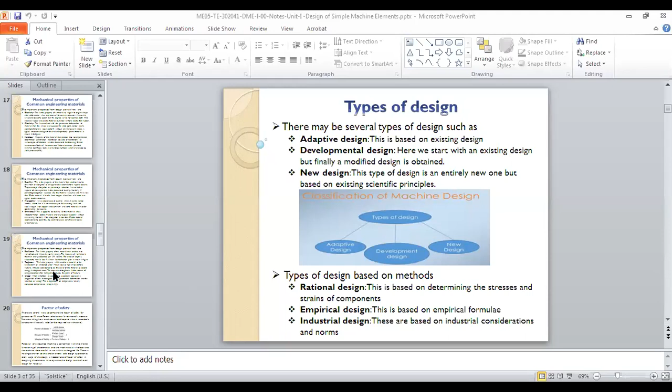I think last time did we finish all the mechanical properties? Just let me know in the chat. Yeah, screen is not visible because I haven't shared it, I am sharing it right now. Before sharing, I just want to make sure what we have covered. Okay, so now the presentation should be visible to you guys. We have seen till the last lecture, I think, different mechanical properties. I think we were at the point till the factor of safety, right? Yes, sir. Okay, fine.

So what we will do today is go through this, because I have to go a little fast, as we have to complete three designs: cotter joint, knuckle joint, and lever, as part of this first unit. But I just want to make sure your basics are clear before we proceed, at least the notations, and what are the different materials we use, so that those are clear to us and we have some basic knowledge. We have to spend a couple of lectures on this, no option for that. So today we'll try to finish.

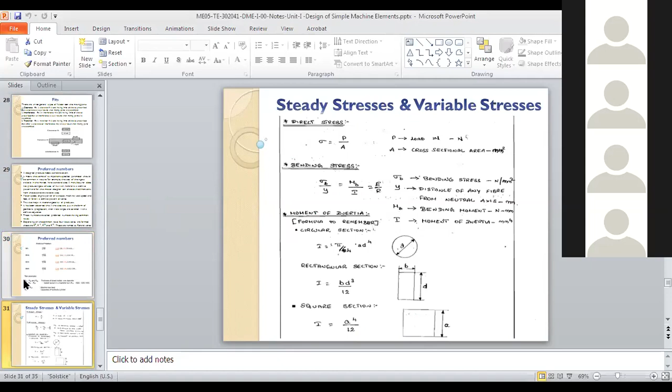What is factor of safety, then what are the different kinds of limits and tolerances, fits, and then preferred numbers. I just want to finish with preferred numbers, and if possible, start with the basics of stresses and how to calculate basic stress. So we'll try to go through that today.

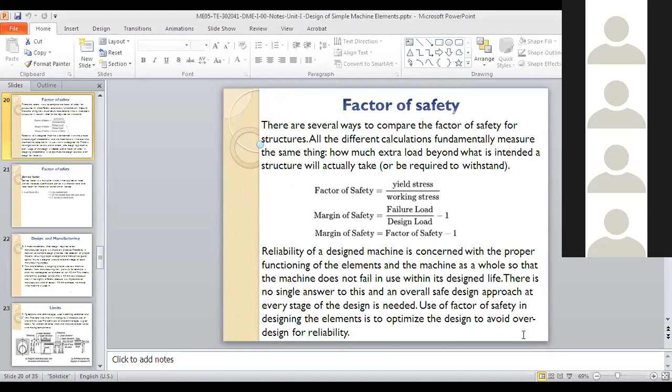First, factor of safety. You guys know what factor of safety is, right? Or why factor of safety is there. Whenever we are doing any kind of design, at that time, just let me pause this.

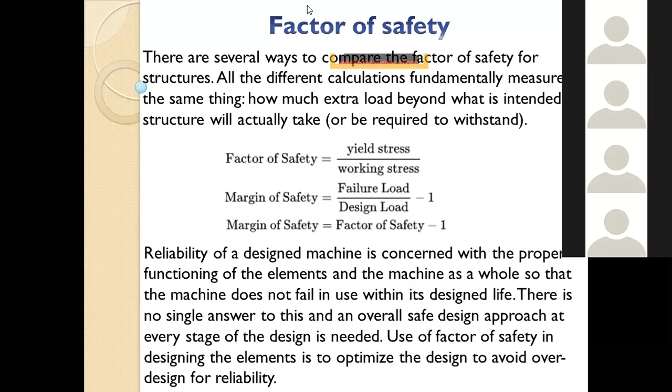Okay, so now what is factor of safety? Whenever we are doing any kind of design, we need to have some kind of margin. Say if you are making a bench, and with the load of one person, 100 kg, it fails, then you cannot design it for 100 kg. You have to make sure, because that bench may not be used by one person, maybe two or three people will be sitting on it. So you need to have some kind of margin, a safety buffer, in between those two, so that even though your load goes up, still your design will not fail. That is something called factor of safety.

I will not go into too much detail because you already know about it, but I just want to cover the basics of what factor of safety is. Like for a plane, it is fatal - if something goes wrong, if any part fails, it's fatal.

It means it might affect, it could directly be, you can say, a reason for death of people. So there you have to put a higher factor of safety. But in a flour mill, or where there is not very high risk, you can put a lower factor of safety.

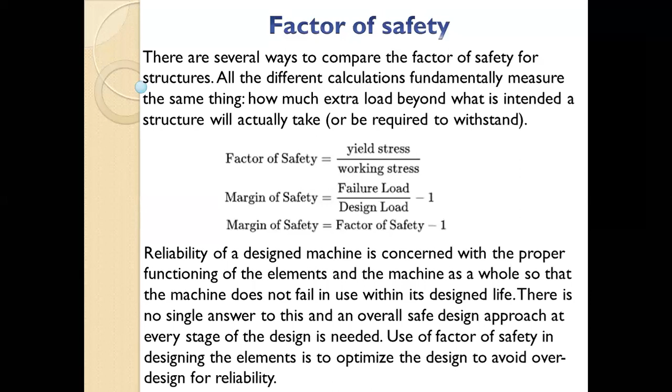Now, reliability - with a higher factor of safety, your design will be more reliable. But you cannot put a very high factor of safety, because as I said, it will increase your cost or raw material. That's the issue, so you have to be very careful while setting the factor of safety.

Now something called service factor. Okay, let me just - I can hear some people. Someone has a question - Pankaj, yes Pankaj.

Yes. Sorry for the interruption, sir. I want to ask regarding the factor of safety of an aeroplane. Its factor of safety is high, right? Yes, more than usual. Actually, you want to know why it is high or how it is calculated.

As I said, for the aeroplane you have to have a high factor of safety. The reason is that if anything goes wrong, it is fatal. Fatal means the after effect will be death. So if your engine's nozzle fails, the engine fails, and there is no option of taking the plane aside, repairing it, and running it again. No, it's in the air. It is fatal.

If you are going to use the same nozzle in a road vehicle, your factor of safety will be 2. But for a plane you will be putting factor of safety of 3, because you want to be more cautious, you want it to be more safe. The problem with more factor of safety is that your design will be heavier and more complicated, but it is okay for the plane because you want to spend more money rather than losing people.

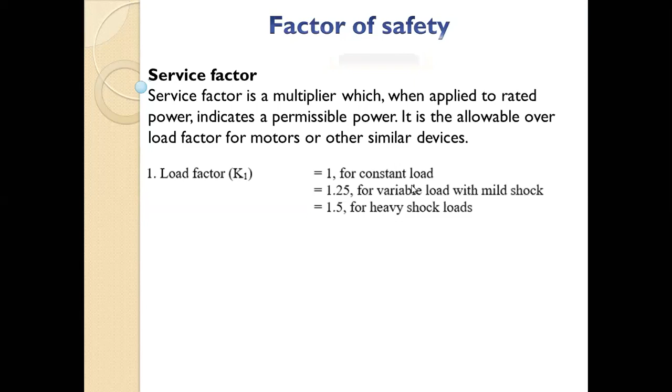Now we are actually starting with design and manufacturing. You need to know that when we are doing any kind of design or manufacturing, the output of our design will be a diagram. For the workshop or manufacturing people, we need to give them diagrams showing how the design looks and its dimensions, and depending on those dimensions your manufacturing will be done.

But for the dimension, now the problem is when we say my shaft or gear has to be with certain dimensions, or my shaft has to be 40 diameter, when we actually manufacture it, it will not be exactly 40, because there are so many factors, starting with the skill of the person manufacturing it, the labor, the machine on which you are manufacturing it, and the tool you are going to use.

If your tool has wear, then your finishing will not be fine, or it has vibrations, or the lubricating liquid you are using is not proper. So with so many factors, starting with the raw material not being of good quality, to the finishing process you are using, there are so many factors affecting the quality of your product.

So your ultimate final outcome may not be 40, it may be up or down. Are you getting my point? So when you are manufacturing anything, your output may not be what you expected, because every time you cannot say I want exactly 40 for each and every part.

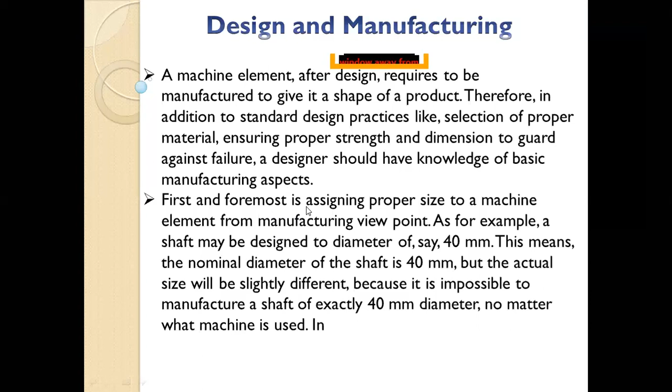This is where you have to do the design, because you cannot exactly expect 40, it will be very difficult to manufacture that. So for that you will be using limits. I will not go into too much detail - I hope you have gone through these limits and tolerances in other subjects. Actually, it is not even part of our syllabus, but I just want to make sure everybody at least knows what limits and tolerances are.

In this example in the diagram, I have shown the shaft and hole. For the shaft and hole, minimum diameter cannot be less than this, because otherwise it will be jammed with my shaft for a hole. And my maximum diameter, if it goes beyond this diameter, then my shaft will be too free to rotate. Similarly for the shaft, maximum diameter and minimum diameter is there.

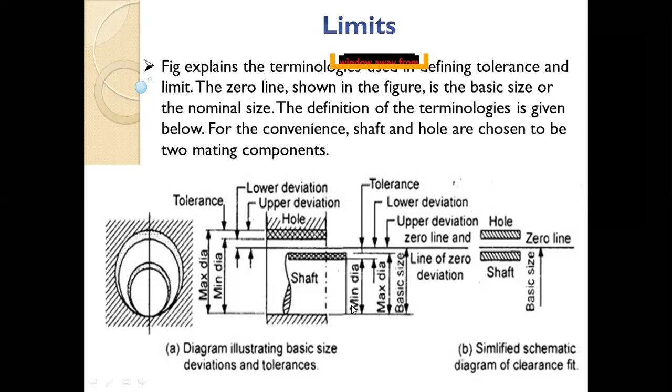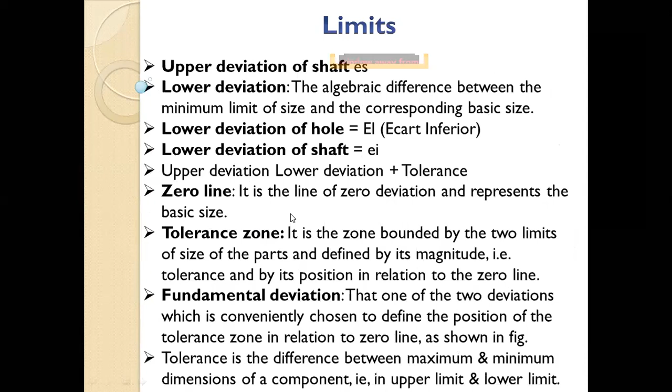These are the deviations - how much I can deviate from the mean. So mean is 40. I can go up by say 1, 2, or 3, whatever it is, and I can go below by 1, 2, or 3, whatever it is - whatever limits you are going to put. So depending on that, you will be putting limits. These are all the basic size, actual size - all these you already know about, so I will not go through it, but I will put it in my presentation. You can go through that later if you want.

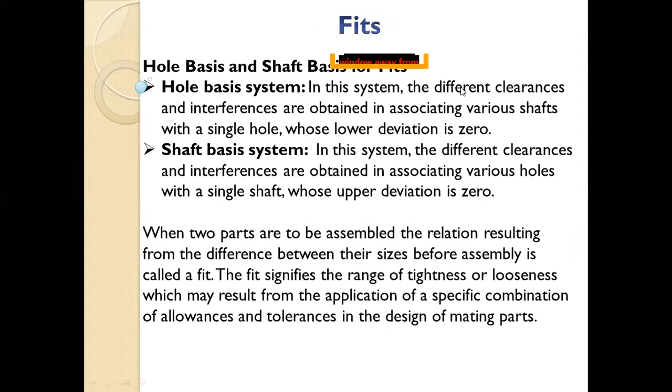Now for fits, there are basically two systems: hole basis system, in which the hole is the base and you will be changing the shaft, or shaft basis system, in which the shaft will be fixed and you will be having different kinds of holes. So there are two systems for what you can say fits.

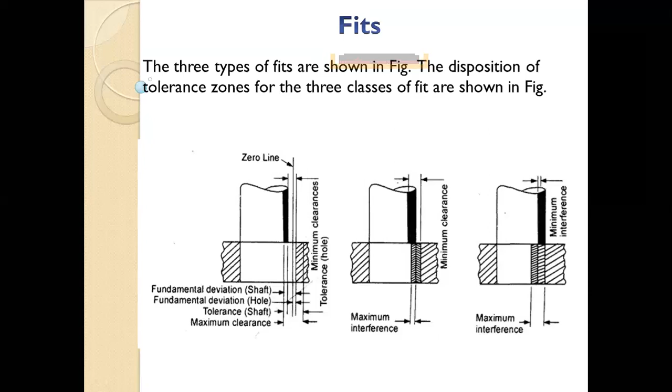Now there are three types of fits: first is clearance fit, second is interference fit, and transition fit. Clearance fit means whatever two mating components are there, they have a clear clearance between them - between shaft and hole there is a proper gap. If your shaft's maximum limit is 41, then your hole's minimum diameter will be 42, so there will always be clearance. Your hole will never become below 42 and your shaft will never go above 41, so there is a proper clearance.

But it is possible, in what I'm going to call transition fit, your shaft is from 40 to 41 and your hole is from 40 to 42. That means there is a possibility that sometimes it will be clear, sometimes it will fit. So that is called transition fit - it is in a transition phase, going from clearance towards interference.

And interference means it is interfering - your shaft is having a diameter of 40 and your hole is having a diameter of 39. So that time it will always be having interference, it will be fit into each other. So that is interference fit.

If you look at this diagram, where I have put a cross mark for the hole and the shaft is blank, so the hole is above the shaft - shaft and hole have a clear gap between them, it's a clearance fit. In the diagram below, now the shaft is going above the hole - that means it is definitely going to be interference, fit into each other. And when it is in between, you cannot say definitely, it's a transition fit.

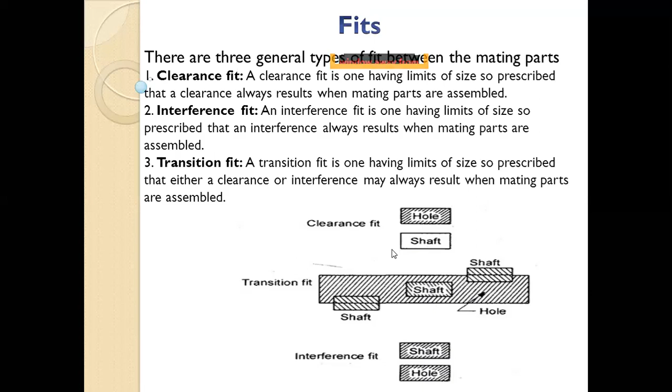Now, something called preferred number. You should know about it. What are preferred numbers? There are some series we use: R5, R10, R20. What are those series? We'll talk about this. These are called Renard series.

But what is this preferred number, and why are these preferred numbers required? Whenever you are going to do a design, you will be using this preferred number series, or when you are going to develop a new product, you need to know the preferred number series. Whenever you go to the market and say I want something, you cannot say I want this gear of whatever dimensions, or a rope of whatever size. The rope will be available only in specific sizes in the market. You cannot get any size.

Why is that? Because, like steel for your concrete, there will be 8, then 9, 10, then 12. 11 will not be available. After 12, there may be 14 or 15 available. This is true for everything.

Like if you go to buy a motor, the RPM of the motor will not be any RPM. It will be from say 1200, then it will go to 1500, something like that. It will have a certain jump, after this, the next available is that. Now the question is, why is that? Because as a manufacturer, you cannot produce every rating or dimension of a component. So you have to have some standard.

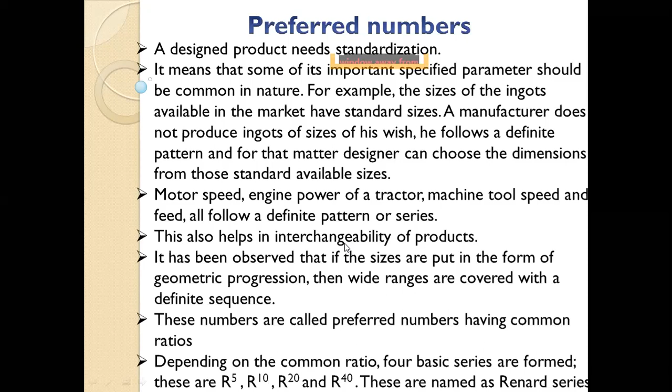So this next number is called the preferred number. This is what I am preferring, I want this number. So how do we come up with this number, or what is the best way to arrive at it? We have something called a preferred series, the Renard series.

We use something called R5, meaning the fifth root of 10. If you take your calculator and find the square root of 10, it will be about 3 point something, since the square of 3 is 9. Similarly, if you take the fifth root of 10, it will be 1.58. If you take the 10th root of 10, it will be 1.26. If you take the 20th root of 10, it will be 1.12. And the 40th root of 10 is 1.06.

So these are the four numbers we get - these are the standard numbers. These numbers are not from thin air; they are the roots of 10. R5 means the fifth root of 10, and R10 means the 10th root of 10.

R20 means 20th root of 10, and R40 means 40th root of 10. It's very simple. Once I got this number, I got 1.58, 1.26, 1.12, 1.06. I will use those for my series.

If I started with 1000, next will be multiplication by 1.58, giving 1580, standardized to 1600. Next, multiply 1.6 with 1.58, that gives 2.49 something, so next is 2500. So whenever you are doing manufacturing, you will say 1000, 1600, 2500, 4000 like that, you will be having a series. This is a series of progression, or series of R5.

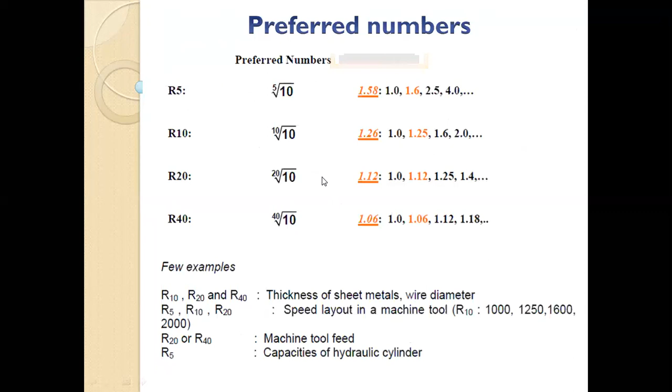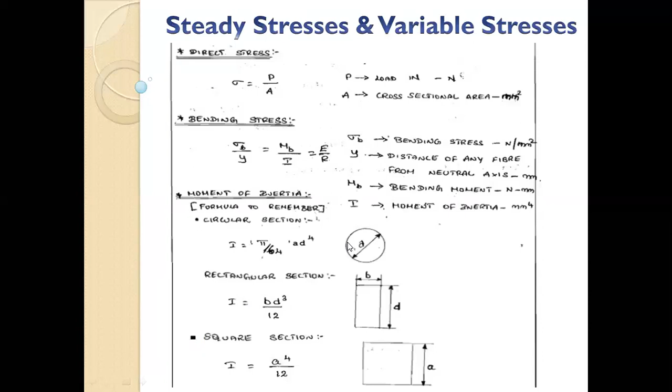Okay, I think time is 11:36. Should we go ahead with the next, the basic stresses? We tried to complete all things whatever is mentioned in the syllabus. Some things are not in the syllabus, still I tried to cover it, because you need to have that background ready with you. From the next lecture we'll see how the basic stresses are calculated. What is direct stress, what is bending stress, what is torsional stress, how to calculate those stresses, how that stress comes in the material or in your component.

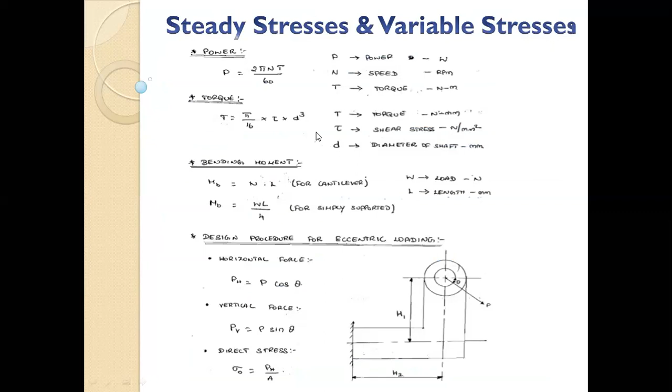Then we'll try to see what is the procedure of design for any machine element. Once we know this process, it will be applied to all our design components. This process is how to find out forces, how to do material selection, then how to use all the basic things we are going to learn, like how to calculate the stresses. We are going to use 3 or 4 equations everywhere. Using those, how to do the design, how to come with dimensions, and then the drawing. We'll go through the cycle of this design in tomorrow's next lecture. So basic stresses and mainly the design process, and then our actual design of cotter and knuckle joint will start.

When we start with the cotter and knuckle joint, I want you guys to be ready with all the basic knowledge, what is the design process, what is the process we are going to follow, and what are the basic stresses. Once you know that, then you can face any kind of design. Design is not a big deal. Process is almost same everywhere. Failure criteria will be different, equation will be different, but process will remain same. So it's not a very complicated thing. Only thing is that your background should be clear, you should have a basic knowledge of stresses, materials, different strengths, or principal stresses, and design process.

So from next lecture we will actually start with the design, with some basic stresses and actual design process. Anybody has any doubt, put in the chat.